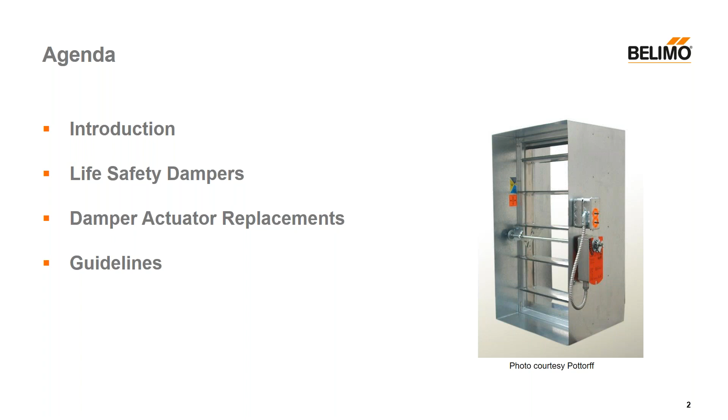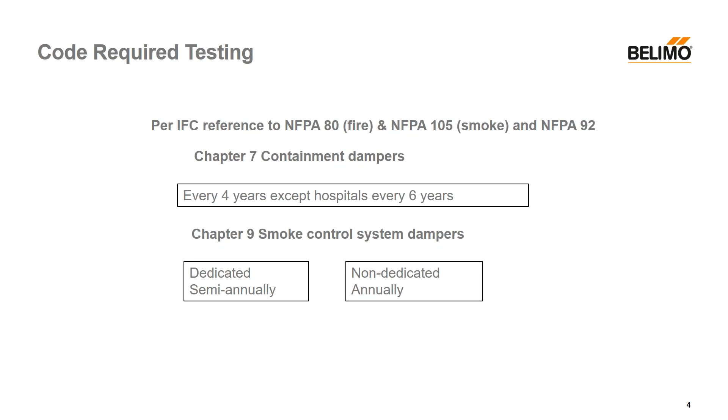The codes and standards, we're not going to get into these in any depth here, but UL 555, the family of standards, are those which define the requirements for dampers, and they're primarily factory construction. They also refer to the damper manufacturer's instructions, which are to be followed for installations. But all of the installed dampers are regulated by the authority having jurisdiction, the AHJ. And they are involved in the new construction also for the approval, seeing that they're tested and commissioned.

And it's very important, the International Fire Code, the IFC, references NFPA 80 and 105. 80 is fire dampers and fire doors. 105 is smoke protectives, and that would have the smoke dampers. So those are the two guiding standards for repair and replacement, 80 and 105.

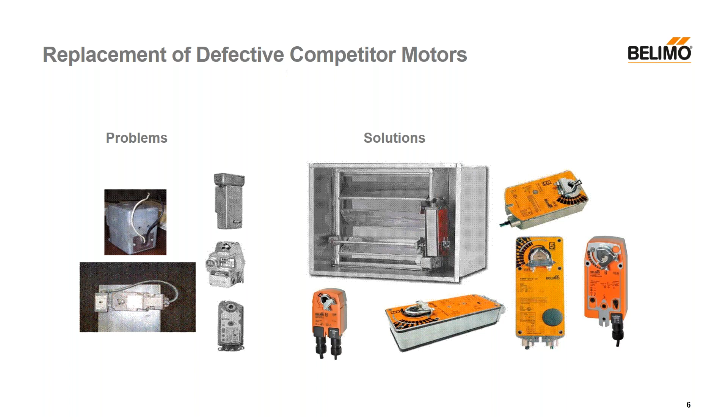So the subject here, we got problems over there on the left side. Old motors, defective motors, and Belimo has various solutions for them. Start with a damper, not the actuator. I get pictures sent to me of an actuator. Well, I don't know how it's been applied, nor do any of our other people. We need to get a good picture of how the damper's being controlled overall.

And we're going to see some examples here of various ones where they're a little bit weird. 80% of the replacements are real easy, but 20% get weird. And you need to investigate a little bit. And once you see how the mechanisms are working, no problem for replacement. But sometimes we have to disable an old spring or make a little change to bring it up to modern standards. So you can see that one on the left there.

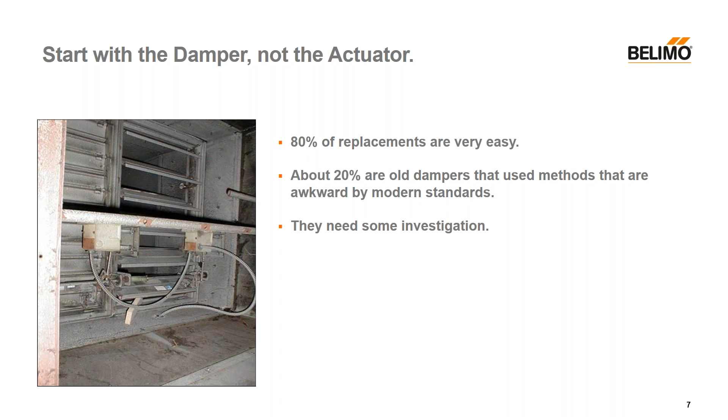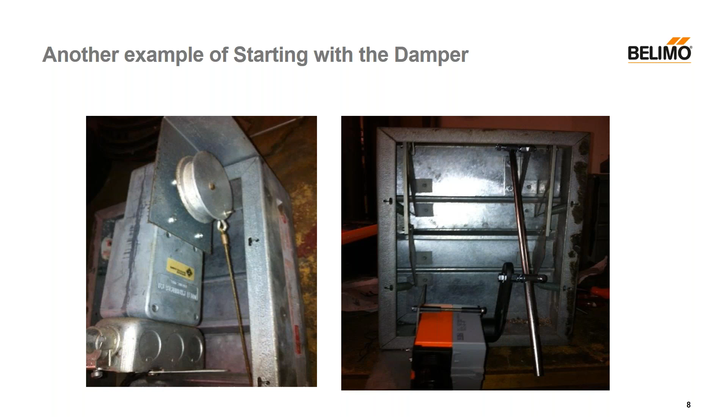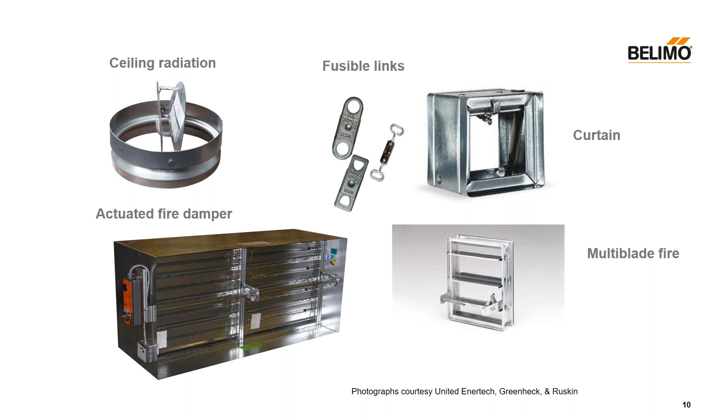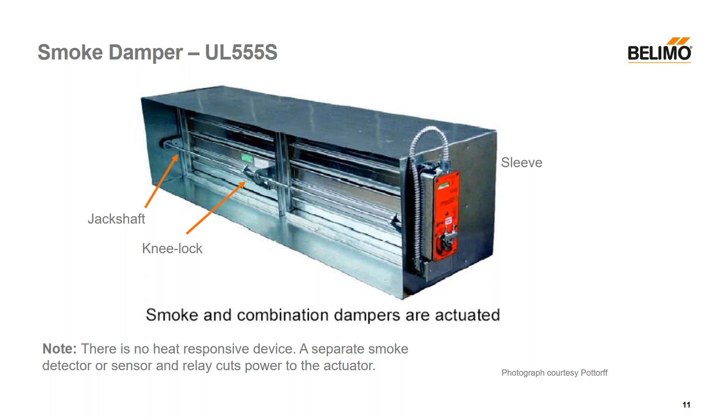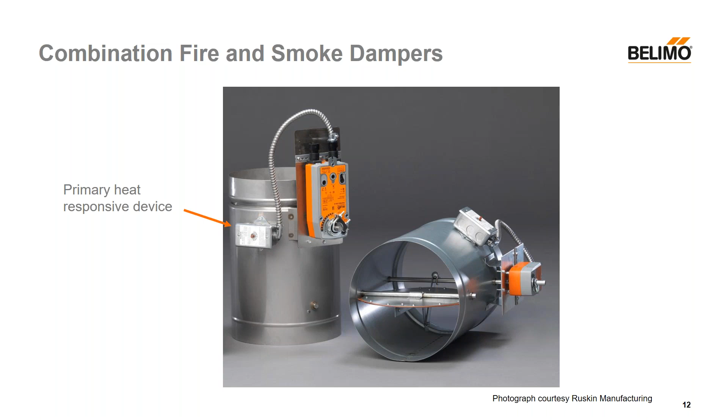The combination fire and smoke damper has what UL calls a primary heat responsive device. It's a bimetal Thermodisc type thing with a manual reset. So you can see the actuator springs closed if power is cut, and that manual reset must be pressed before they're going to work again.

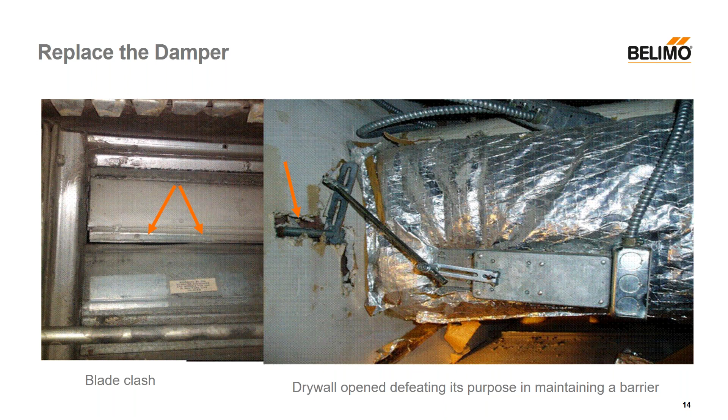The one on the right, well, they broke into the drywall to get to the damper shaft and to get it mounted. And this is just a clear code violation right from the beginning. They either need to put a modern damper in there, or possibly they could put sheet metal behind that shaft and seal up that hole. But it's pretty messy. Really, the damper should be replaced. So you don't always try to replace the actuator.

Now, the reason why we mention that is because the typical old fire smoke combination damper was the same as that fire damper, except that it had an extended jack shaft where they could mount an actuator. So you'd put the actuator on it, and if the fusible link is intact, that spring was no load on the damper, except for some old Prefcos. And you could easily open and close the damper with an actuator.

If smoke was observed, the smoke detector would cut power to the actuator and it would spring the damper closed. If you had a high temperature, the fusible link would melt and the shaft spring would close the blades.

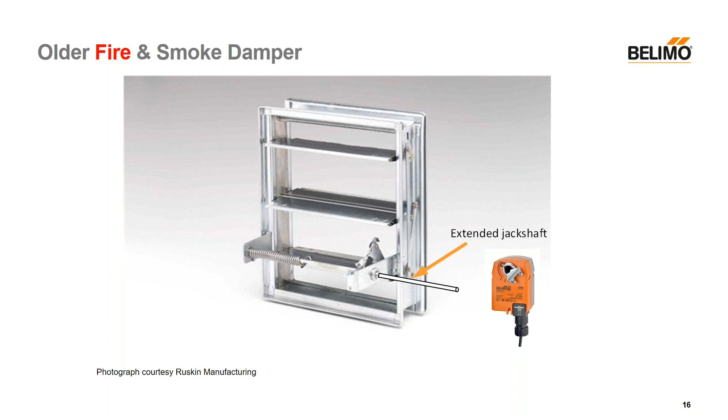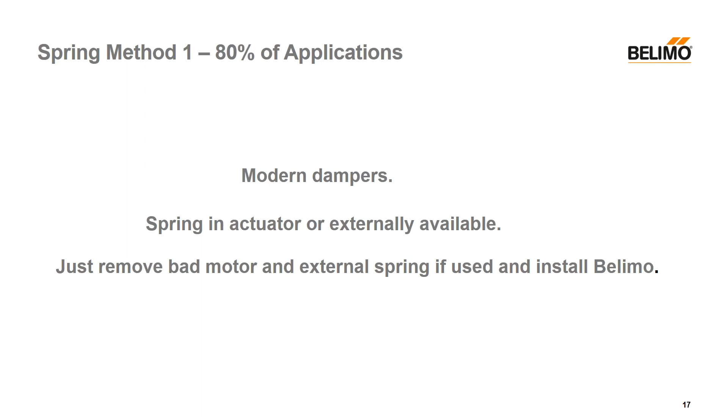So when we start looking at applications, 80% of them are going to be quite similar to what we just looked at. All your modern dampers, the spring is in the actuator or it's external where you can see it, and you're just going to remove the old bad motor and the old spring and direct couple an actuator on it. So this would be typical.

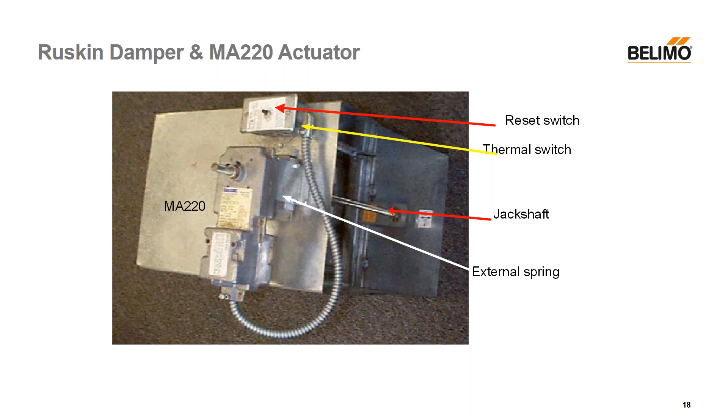This is the Barber Coleman, or the MA220. They're no longer manufactured. The motor was non-spring. The spring is at that white arrow. It's underneath the little housing there. And when you go to remove it, you have to remove the old spring as well as the actuator. So you'd end up looking like this. This is the same damper. So you just drop an actuator over the shaft after removing everything.

And this is going to be a constant theme here among a few pictures. Just find the damper shaft, direct couple over it, and now you've got a setup that looks like a modern damper. So here's your common Honeywell. Well, it's direct coupled right on that shaft. The spring is in the actuator, so there'll be no problem in replacing it.

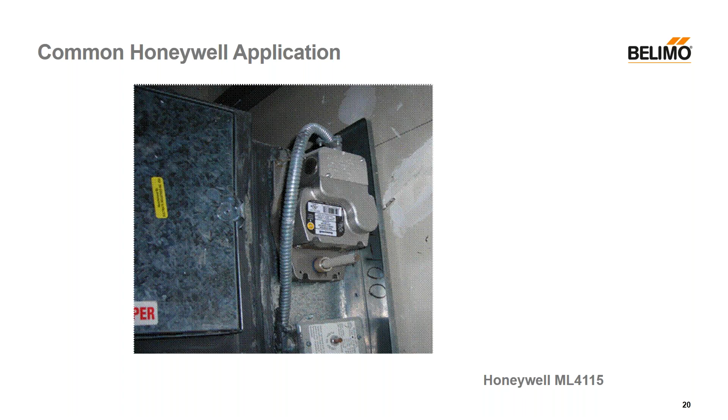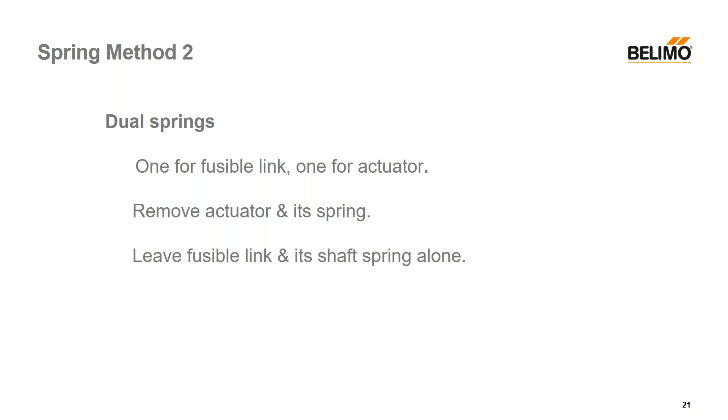Now method 2 is the old dual spring motors, which is the most common, the dual spring damper. So you've probably got one spring for the fusible link and one for the actuator. So you're going to remove the old actuator and its spring, but you're not going to touch that internal spring. So on the left side, there's a shaft spring. Leave it alone. You don't have to mess with it.

On the right side, well, you're not going to try to replace the motor and put a linkage on it. You're going to take off the old motor, linkage, and the bracket. You are going to leave the bearing. You don't remove any bearings. So between the fusible link arms and the external shaft, you've got a bearing in there. You don't remove that. It's needed for the shaft to rotate.

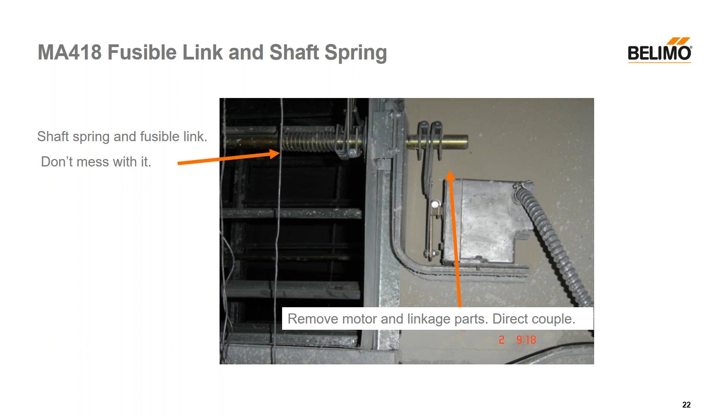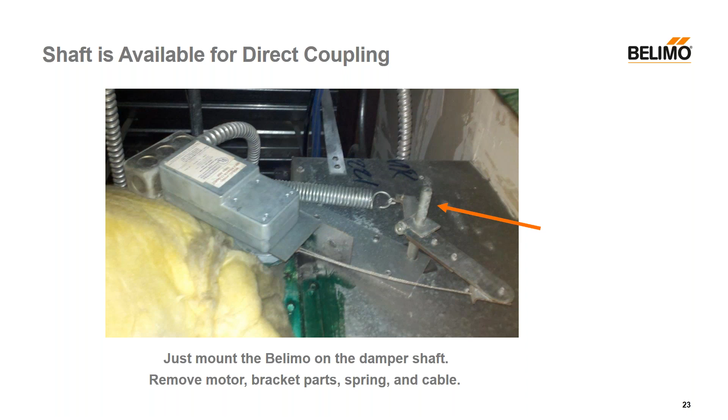So here again, we don't try to replace just that old motor. We're going to get rid of that screen door spring, the old motor, and we're going to take the linkage and the cable off. And now you've got the damper shaft. The orange arrow points to it. And you're just going to direct couple right on that jack shaft. So you're simplifying and bringing it up to a modern standard.

So the springs are easily seen. That motor and spring assembly are just like a modern Belimo. You can pull everything off and direct couple. The toughest part of it is the anti-rotation straps so that you can connect it to the back end.

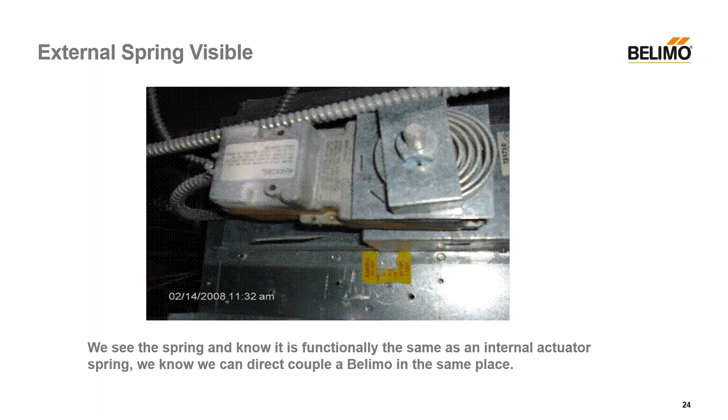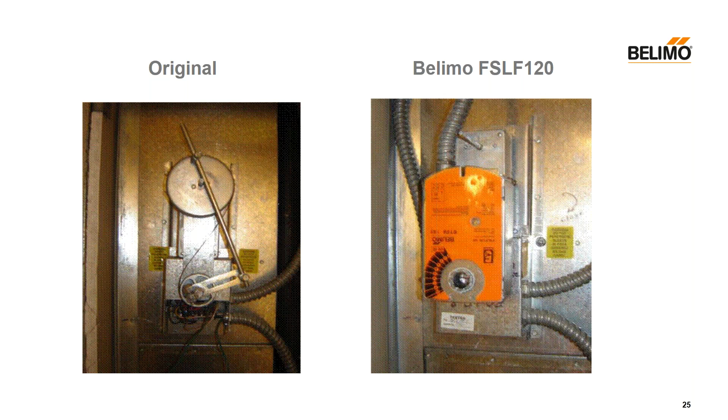Another case, same thing. On the left side, you've got what looks like an assembly, but you're not going to try to replace that old motor. You're simply going to direct couple to the damper shaft. And on the right side, you can see that the old motor is there at the top, sticking out. It made a nice space to mount the anti-rotation strap, so we didn't even remove the old motor. Then the actuator, when it was put on there, well, the damper shaft was short, so we put the clamp on the inside and mounted it there.

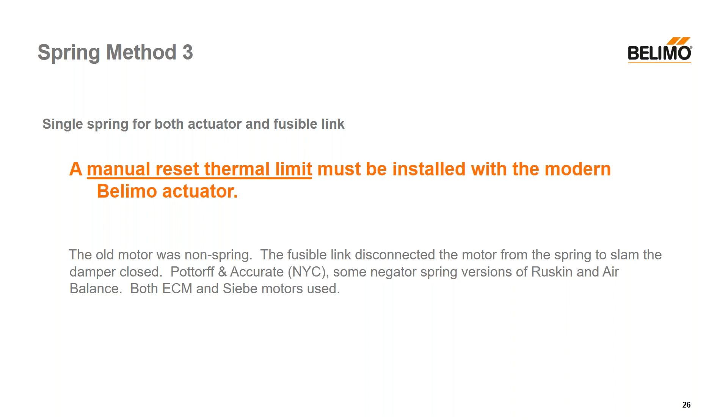Now the weird ones, the 20%, probably not that high a percent anymore, used one spring for both the actuator and the fusible link. And in this case, you've got to add the manual reset primary heat responsive device. So typically the old motors were non-spring, and you had a shaft spring, and there was a fusible link. So the left arrow points to where the fusible link was located.

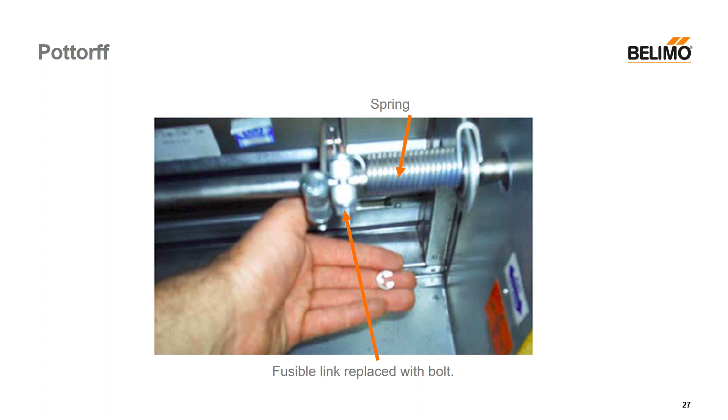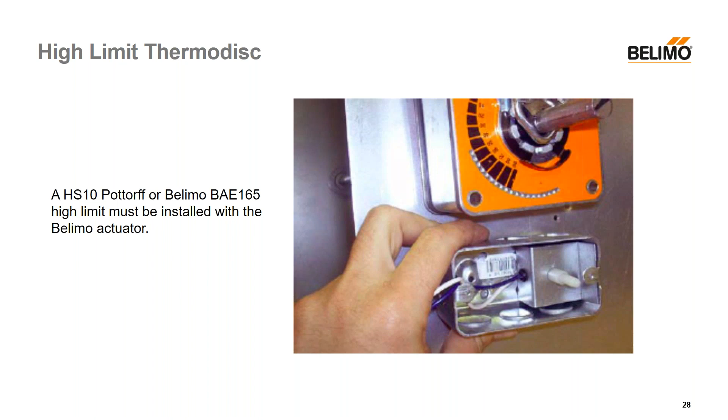You've got to take it off to hold the mechanism together, and then you're going to unhook that spring. And then you go to the outside of the damper and you have to add a heat responsive device. So it's a bimetal manual reset. They're commonly available from any of the damper reps, or the Belimo BAE could be used also. This was how Pottorff did theirs, and there were a few other cases.

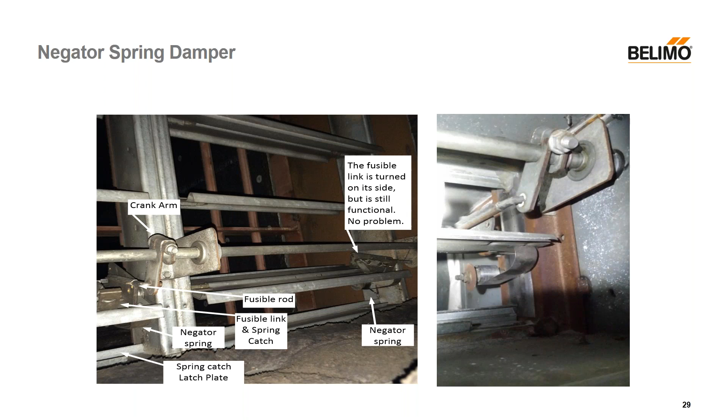The actuator and damper are not connected to the alarm system or the firefighter smoke control system in the Chapter 7 damper, the 85% that are for containment. The alarm system is notified by the smoke detector.

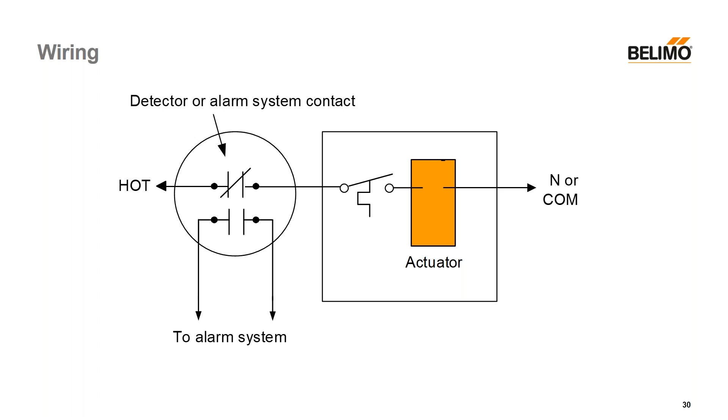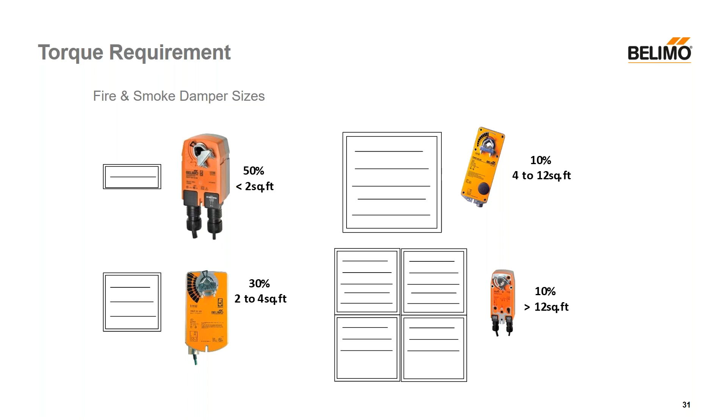You're not going to remember everything we say here, and it is a little bit too much information, the instructions. The other way to look at it is just to go with a torque requirement rule of thumb. This is more an art than a science, because different manufacturers and different ages of dampers and condition really cause you to have to use a little bit of judgment.

But for a parallel blade damper, which most fire smoke dampers are, you're going to need anywhere from 4 to 7 inch-pounds of torque per square foot. It'll be nearer 4 for the smaller dampers, nearer 7 for larger dampers. And if you do have an opposed blade, well, they require less torque. So 4 to 5 inch-pounds of torque per square foot. Those are very safe rules of thumb.

There are a lot of ifs, ands, or buts. For example, the FSLF actuator, which is 30 inch-pounds of torque, well, it'll pass UL 555S with a 2 foot high by 3 wide, but it won't pass a 3 high by 2 wide, because the torque load starts to become higher as you get a taller damper. So the condition of the damper does need to be considered.

If your static is above 4.5 inches of water column, go with more torque. If your velocity is greater than 2,000 feet per minute, then you're going to need more torque. And if you've got linkages that you're applying, sometimes the linkages translate the torque and change the torque curve, so you don't get a nice 90 degree actuator to damper relationship. So you have to start to add a little bit of torque to adjust for the linkage.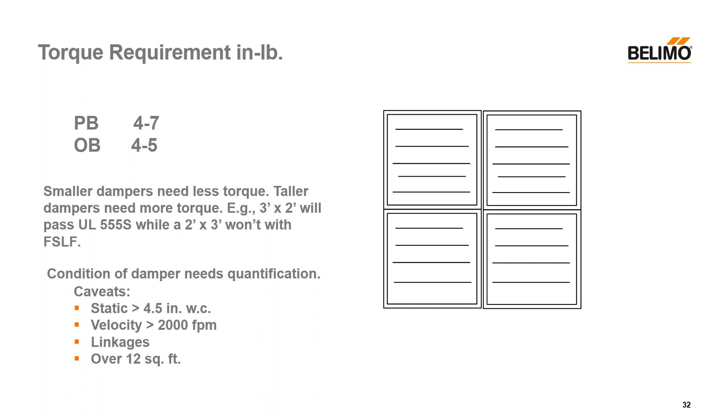It's difficult to tell. And then anything over 12 square feet, you start to see more of a torque requirement per square foot than for a smaller damper. But we do have all the rules of thumb and recommendations in our instructions.

Where to go get information? I think access to information is the most important thing. You can't remember everything. So the website is belimo.us/firesmoke. That gets you to our retrofit pages and all kinds of instructions. And you might note that the instructions start with the name of the damper manufacturer.

There are some specifics, although I would say 80% of the time it's the same old thing over and over. There is a cross-reference along with a lot of pictures of the old dampers. And then there are any number of specific instructions. So that website really can guide you through a lot.